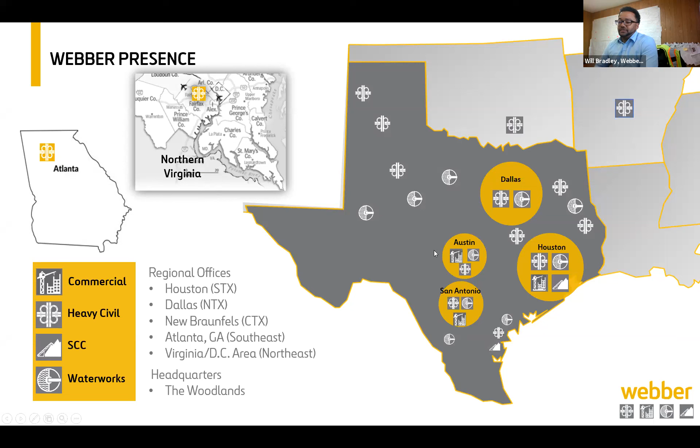A couple of past projects - I mainly wanted to bring these up to show some of the successes that we've had in the past, and how we transferred that, actually having some of the same people that worked on these projects managing the current 146 project too. So two of these projects were very successful for us in Webber's history. They're both projects that we did with TxDOT, and really at the end, the client was really happy with us.

So the first one on the left - can you guys see my screen, see my mouse on the screen, sorry? Yes, we can see it. Okay, so the project on the left is the I-69 emergency bridge project, San Jacinto Bridge reconstruction. This was a bridge that was damaged during Hurricane Harvey. TxDOT had approached us to put together a bid. We were one of 5 contractors that were invited to bid.

We were successful in that project, and we went to work very quickly. We were very aggressive with the schedule, and we finished that project 34 days early. We won both milestones on there, so it was a good project for the company and TxDOT. We were also awarded on that project in 2019 the TxDOT Project Award. So that's one project I wanted to highlight.

The other one, the US 290 Segment 5, is another one. I actually managed this project.

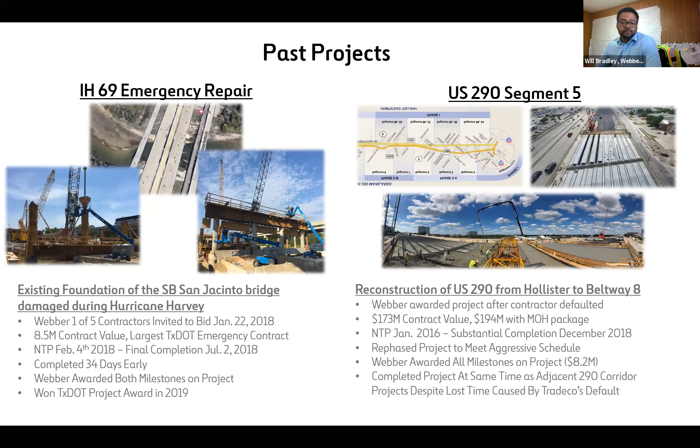So just a project overview. I pulled this picture from TxDOT's website. This project, SH-146, is actually part of the Grand Parkway 99 expansion. As you can see, the corridor, or the quadrant to the northwest, is already complete. Webber has a stake in this portion on the northeast quadrant, along with our parent company, Ferrovial, and another contractor, Granite Construction. The south portion of the Grand Parkway is not constructed yet, but you can see where we fit in here. This is the Clear Creek Channel right here. So 146, again, not only being an evacuation route for the people in Galveston, but also tying into the major improvements of the actual Grand Parkway.

So as part of the 146 project, we are building about 4 miles of highway. One of the major things we're doing here is a bypass bridge. It's a 116-span bridge from just north of NASA. It crosses NASA, crosses the Clear Creek Channel, crosses 2094 and 518, and then lands just north of 96. Along with that, also in the portion in Seabrook, we're converting it to a conventional freeway. There's going to be 2-lane frontage roads on the northbound and southbound, and also 6 lanes of actual freeway roads.

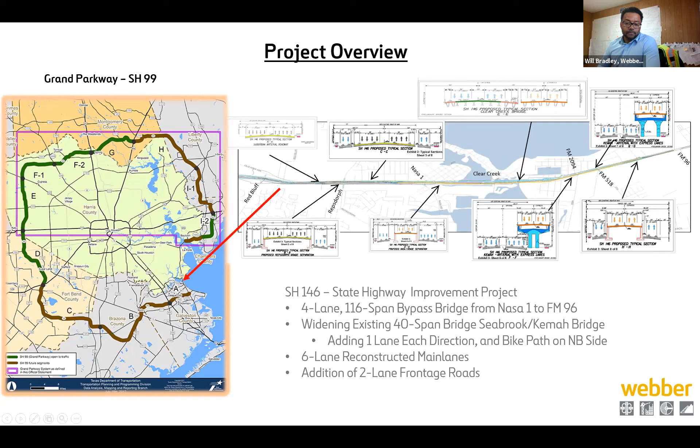Mainly just to go over where we're at right now on the project status: as of this month, November 2020, we're 45% complete if you look at the pay estimate. So if you look at the money we've collected versus the contract value, we've collected 45%. So we've done 45% of the work. We've used only 527 of the allotted contract days. This is the thing that, when we look at jobs, is where we want to be - ahead on work and not using all the time. So this means we're ahead of schedule right now, not substantially, but ahead.

Some of the work that's been completed - you can see here we have our drill shaft crews going right now. There's 450 of the drill shafts out of the 711 total on the project completed so far. We have 3 drilling crews that are going to stay with us all the way through the end of the year. Probably early next year, we're going to drop maybe 1 drilling crew and keep drilling with the other 2 so that we can finish all the shafts sometime around the summer of next year.

Right behind the drilling crews, we have 8 Webber structures crews that are building the columns, the caps, setting the steel girder or concrete girders, as you can see in this picture on the bottom, and then placing the actual concrete deck. So on the express bridge, which is the bypass bridge I was telling you about earlier, we've made 2 placements already, which consists of 8 spans, and we're going to make another placement here sometime next week, which will give us another 3 spans.

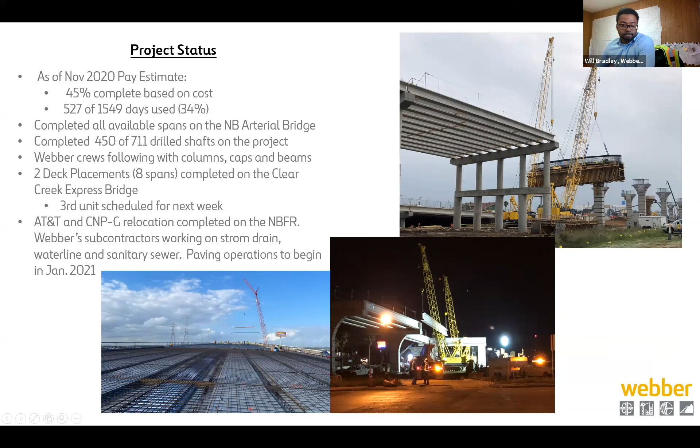Just to go over our strategy, as I mentioned before, we're really aggressive on the schedule. If you look at those past two projects I went into, we brought that same idea of trying to run and work everywhere we can to this project.

So if you look right here on the bottom, this is what our schedule looks like right now. Our current schedule shows us completing the project on May 2nd of 2023, which is over a year ahead. This is the contract date down here, June 1st of 2024. This is the contract date that, per TxDOT, is the time we have to build the project.

It's 1,549 days. We should be finished a little bit more than a year ahead of that, 12 to 13 months or so. One of the reasons why we're able to do that is that early on in the project, even before NTP, before we started working, we looked at the plans.

We came out, visited the site, and identified a lot of areas that we can work without affecting the traffic. In the specifications from TxDOT, they tell you, hey, this is the phases I want you to work in. I want you to work in phase 1, then phase 2, then phase 3, then phase 4.

What we did is that the specifications allow us to work in multiple phases with the caveat that we don't affect the traffic. So there's two lanes going northbound and two lanes southbound on 146. If we don't affect that, then we can pretty much work where we want to. We took advantage of that, and that's why we're able to get this reduced schedule. So this is what we're looking at right now.

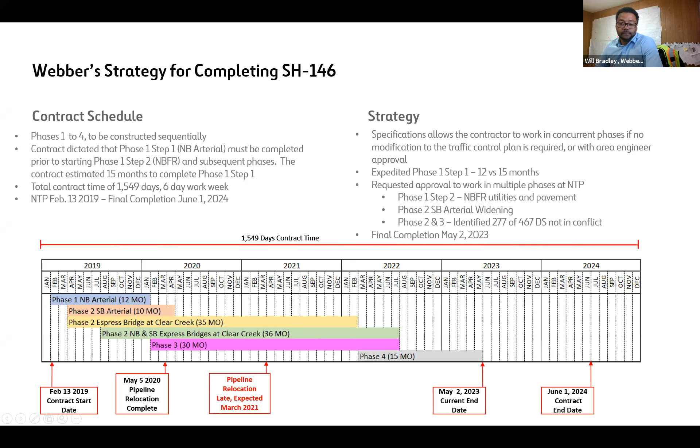Just to go over, I don't want to dwell too much on some of the challenges, but I think some of them are important to go over so everybody understands what we're dealing with. As I've mentioned before, the pipeline relocations—there's a major pipeline corridor running along the project all the way from Red Bluff to 96, right in this area where the existing power lines are.

So we have one of those pipeline companies, Enterprise, which was supposed to be relocated by May 5th of 2020. They're still not relocated yet. They just recently moved onto the project and started their work, but they're projecting right now not to be finished until March of 2021.

So what that does for us, if you look at this picture up on top, you can see we're coming with the structures here. We've got beam set, we've got caps ahead of us, we're building columns, but then when we get to this area here, we can't finish our work because that actual pipeline is in our way. So it creates an issue.

We're trying to work around it. We're trying to work with TxDOT to come up with some ideas or ways that we can get around this pipeline so we don't have to wait on that date.

The other issue is that Enterprise is going to relocate, but then there's some questions about what they're going to do with the relocated pipe. They're saying they're going to leave the pipe in the ground. It creates an issue if we have a direct conflict—we can't put a drill shaft into that pipe. So it's something we're going to have to look at.

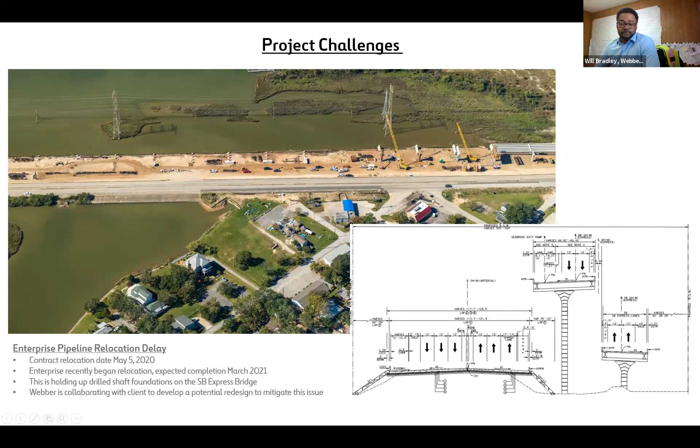Same kind of concept with the Enterprise gas line. We also have other utilities, AT&T, CenterPoint Gas, that are late. So if you look at this picture on top, we have beams out here in the middle of nowhere. They don't connect anywhere.

Right in this area there's 5 more bents we need to build that connect up to the abutment. This road on the left is NASA 1. We'll actually cross NASA, but we were only just allowed into this area now because CenterPoint recently finished their relocation, which they should have completed in February of 2019. This is where it causes issues for the contractor, because these utilities are so far behind. We're trying to get the project done in a timely manner, and that's why we're pushing.

So we went ahead and did the shafts, columns, and caps, and set the beams where we could, leaving out the ones we couldn't access, with the thought that these utilities would be completed in a timely manner. That didn't happen, so we ended up with gaps like this.

Another thing we're trying to do, on the west side of the structure, is build the future southbound frontage road. We can't build it right now because the Enterprise pipeline is under where the road is supposed to be. We approached TxDOT and asked if we could take the storm drain system that's in direct conflict with the Enterprise pipeline and move it toward the east.

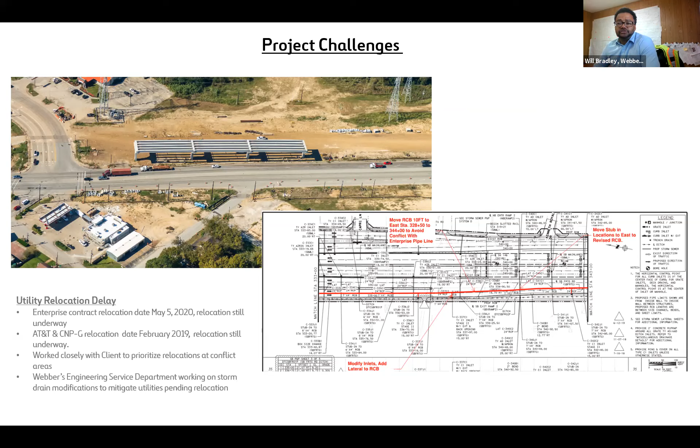We didn't do that. We got approval to work in multiple phases, which saved us a lot of time on this delay.

What happened is we were driving piles in the water. We did two footings on bent number 26, then moved over to 25. As we tried to drive the piles in the water, we hit some obstruction on the bottom and couldn't get them in, so we moved over to 24.

The same thing happened again. We tried to drive the piles in the water and couldn't get them in. We did some probing and figured out there was a substantial obstruction in the water. We told TxDOT we couldn't get these piles in and needed to look at alternatives for a redesign.

We had our technical services go out and look at solutions, but we couldn't come up with anything TxDOT liked. So TxDOT did the design on their own and changed those piles to drill shafts. Webber then found a specialty contractor who could do drill shafts, but they would have to drill through the existing obstruction.

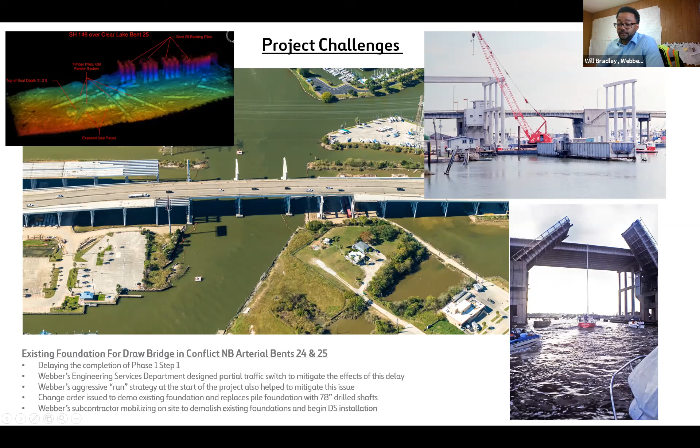We very early on looked at that and identified it as a problem. We approached TxDOT and said, is this really something you want us to do? It's going to back up traffic both in the mornings and evenings. Let us try to look at some solutions. They agreed to it, and then we approached our engineering services department, and they were able to come up with this detour for us where we could eliminate that single lane in each direction for that 8-month time period.

So again, the engineering services department for us, and how Webber approaches the project, this was a win-win for the client, the traveling public, and for Webber, because it allows us to do some of the work in phase 2 instead of phase 4, which is what we want to get done earlier. And for the public, it eliminates that one lane in each direction, so the public will never even see that at all. There's going to be no complaints about it. So it's something we were looking at far in advance, and we're able to come up with a solution.

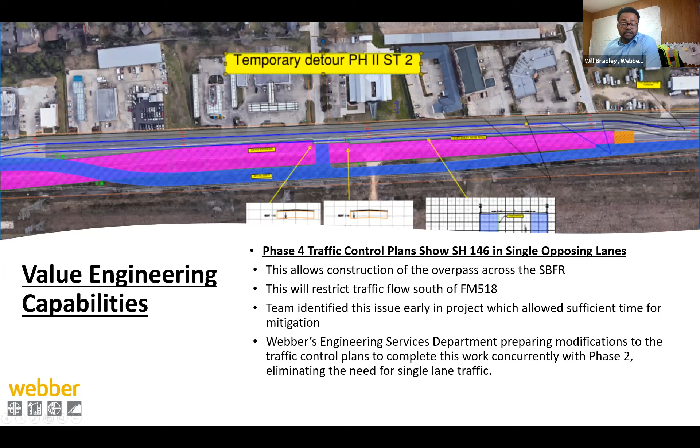So right now our guys are actually working on the redesign on the traffic control, and coming up with the actual drawings for us right now that we can put in place sometime in January of next year. And then I think that's pretty much all I had.

I wanted to just summarize here, again, this concept of running, we want to work everywhere we can, which is the way we approach the 146 project. We want to look at our value engineering. We have several different aspects of value engineering going on right now, the redesign on the storm drain, the redesign for the traffic control. Really our main goal is to complete a successful project for the client, for Webber itself, and for the traveling public. So with that, I would open it up for any questions that you guys might have.

Give me 1 second, let's see. Do we have a question coming in? And Will, while I'm looking for that question, it looks like maybe from...

Ronnie Richards. I did have a question about the storm drainage situation and how that makes up the component of this whole project. Because over the past decade, I think in TxDOT projects we've seen more inclusion of storm and drainage solutions. So what role does that play with the 146 project?

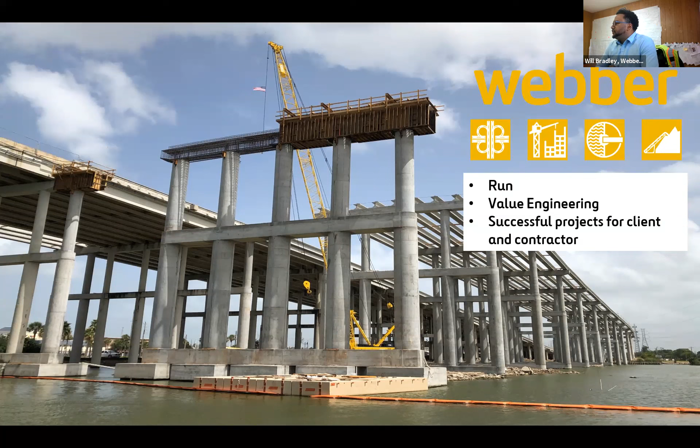Well, can you see my screen when I do this? Can you see Google Earth on there or no? I'm seeing your presentation. Let me try to share. Let me do one thing. Okay, here, sorry, let me see if I can share this. That way I can explain better to you. Okay.

Are you able to see Google Earth now?

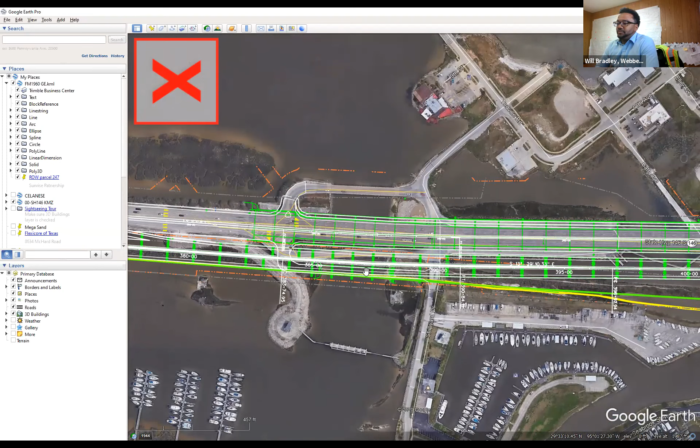The storm drain work is part of our contract, so we have a specialty subcontractor that would come out and execute it. But what we did in that area, because the enterprise pipeline isn't done, let me zoom in and get you some bearings. North is to the left, south is to the right. This is NASA 1, and this is where we're building the existing bridge right now. The enterprise pipeline is right here. So we can't do any of this frontage road work until that's taken out of our way, which is late.

It should have been done already. We approached TxDOT, and normally they would come up with the redesign on their own, but I think it was just a problem of timing and where they have their resources right now. They weren't able to do that, so we offered up our capabilities and they agreed to it. We're actually working on that solution right now.

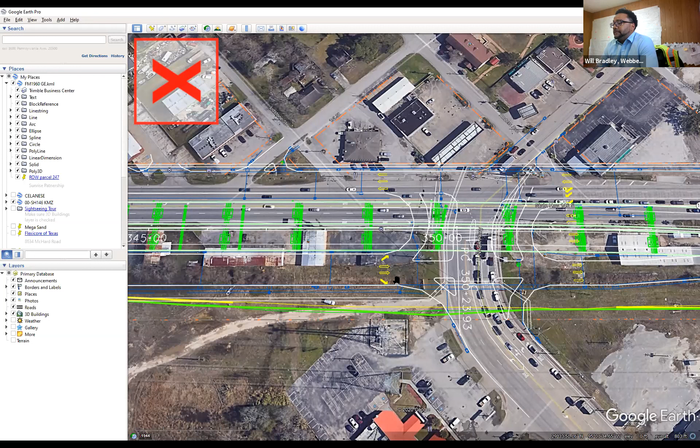Okay, all right, thank you.

Ronnie Richards is asking if we have any idea when the connection between the Kemah and Clear Lake Shores under the bridge will be completed so we can access Kemah by golf cart and bike.

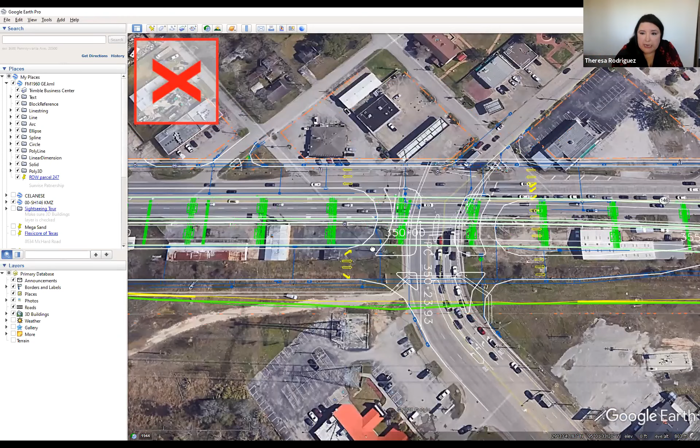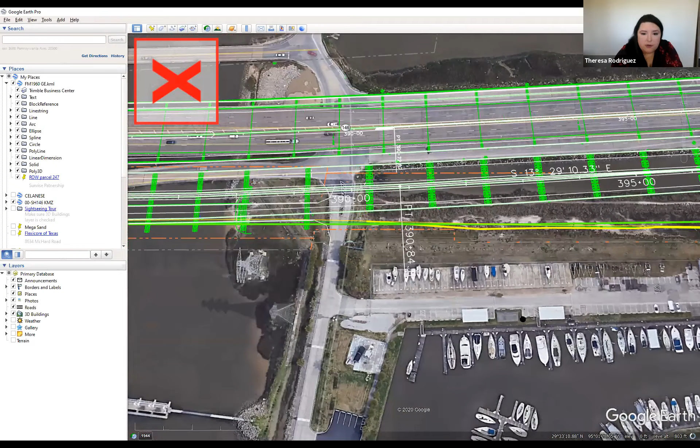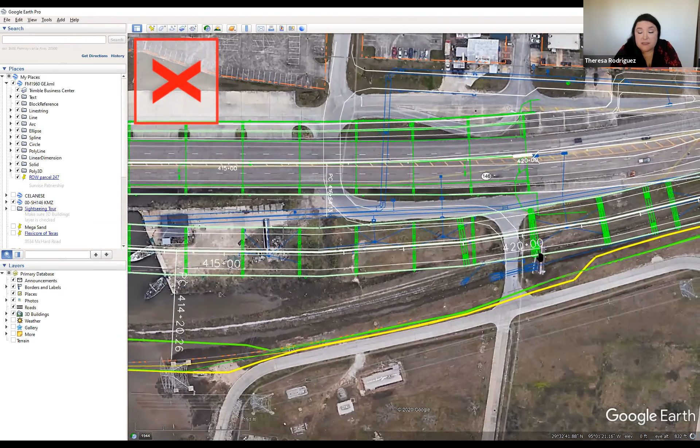Can you repeat the question for me, Theresa? Sure, the question is if you have an idea when the connection between the Kemah and Clear Lake Shores under the bridge area will be completed so that Kemah can be accessed by golf cart and bike. Well, I assume he's talking about this portion right here.

Under the bridge there was an underpass, like in this area here if you can see my mouse. Really, because of safety concerns, we're going to have to get out of phase 2 first, which is us building the actual express bridge. That's probably not going to happen till closer towards the end of 2021, so we won't be able to open that actual access way until the end of next year sometime.

We do have this portion to the north opened up, kind of halfway in here, so you can actually use a portion of this U-turn, but there's no paving here right now. If you look at the project right now, this is where we have all our construction equipment. We're setting the girders across here right now, and building these caps on this side. So I'd say towards the end of next year is when we can look at that being opened up, before the project is done, of course, but not until we get some of the bridge work done.

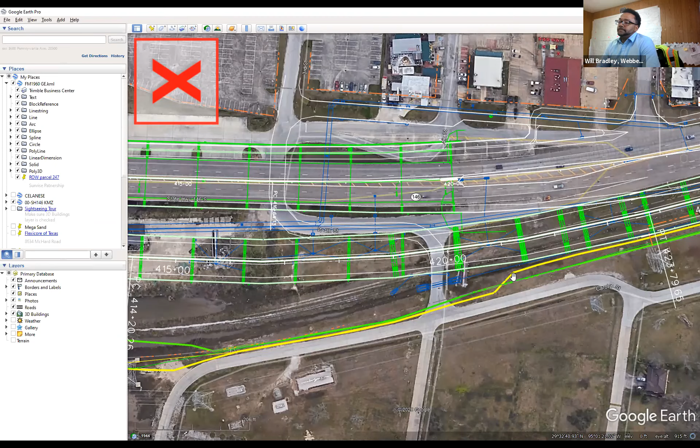Okay, let's see. And from Seabrook Council Member Ed Klein, he's asking what the schedule is to complete the northbound bridge.

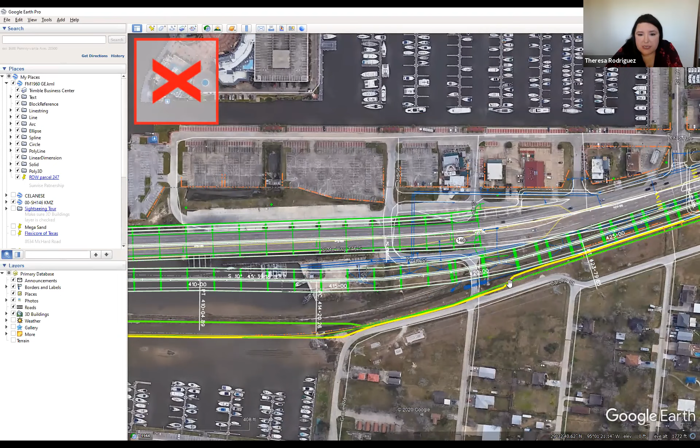The northbound arterial bridge. Well, really, this is the area that I showed you where we had the conflict, where we hit that existing obstruction. So we have our contractor on site right now, our subcontractor that's doing the drill shafts for us. He probably needs about 2 months to finish that, and then it's probably going to be another 3 months or so. So I'd say sometime towards the summer, we'd be able to open up the northbound portion of the arterial bridge. But it should have been open already.

It's not open right now because of this issue with the obstruction from that drawbridge that was here, because we can't build these two bents here.

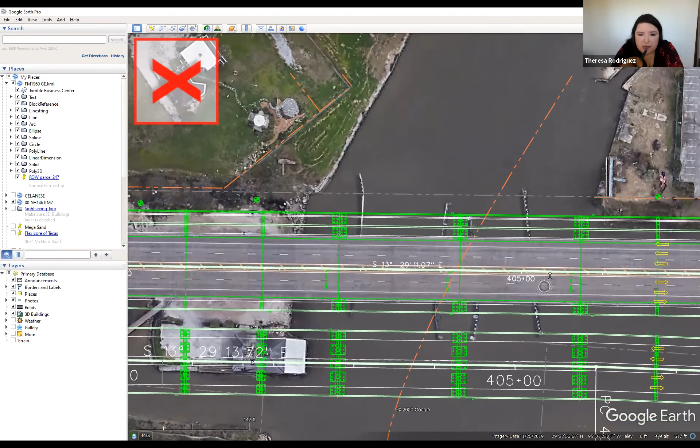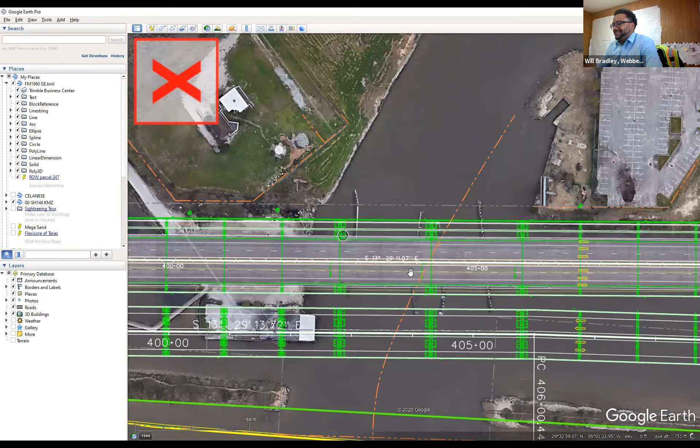All right, I'm not sure if this was just for clarification. He asked again, what is the schedule to complete the northbound frontage road between NASA Road 1 and East Meyer? Oh okay, he's talking about a different area, sorry. That's okay, yeah, the frontage road.

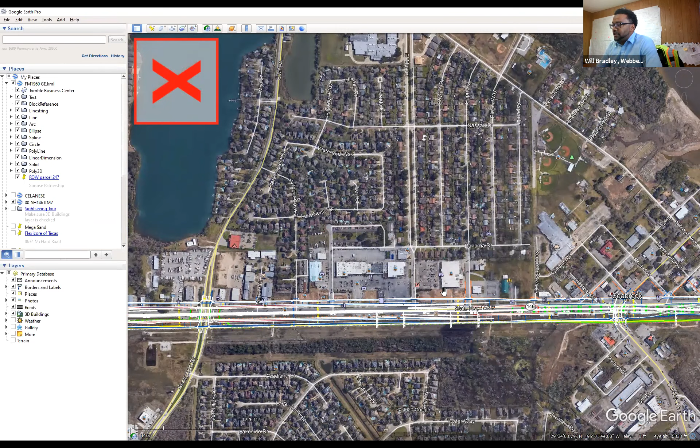Okay, so really, this is NASA 1 right here, and then East Myers is just up this way, or Repsdorf is right here. So really the problem with this area is that it's part of phase 1, but when we took the project over, AT&T and Centerpoint Gas had a lot of conflicts in this area from those two utilities. They just recently completed their relocation.

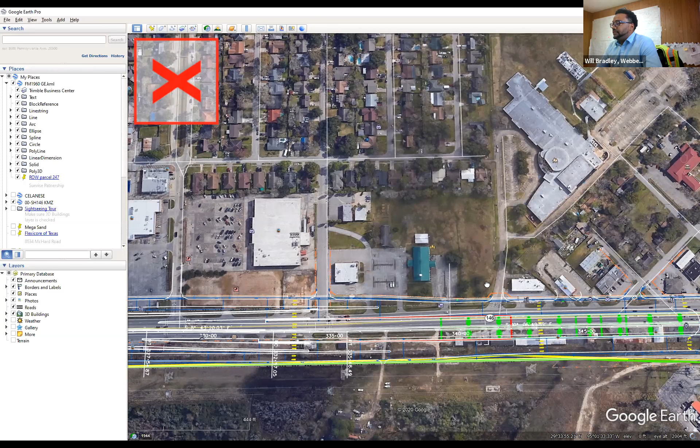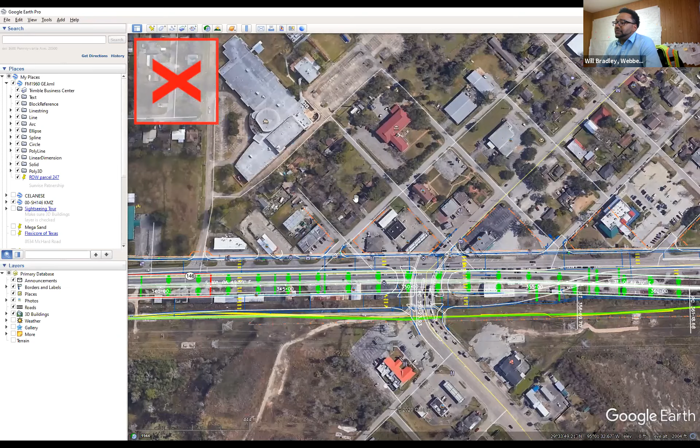So the plan right now is that we have our crews finishing up the storm drain, the water line, and the sanitary sewer. Then come January of 2021, a couple months from now, we're going to start actually paving. So I'd say maybe just right before the summer or so, we should see some actual concrete paving on the northbound frontage road. It's going to be right around 3rd Street or so, all the way up to Red Bluff, not just up to East Myers, so we'll be tying that in also all the way down.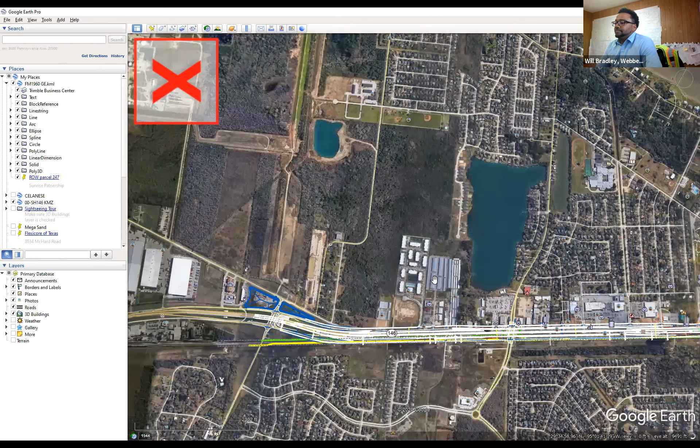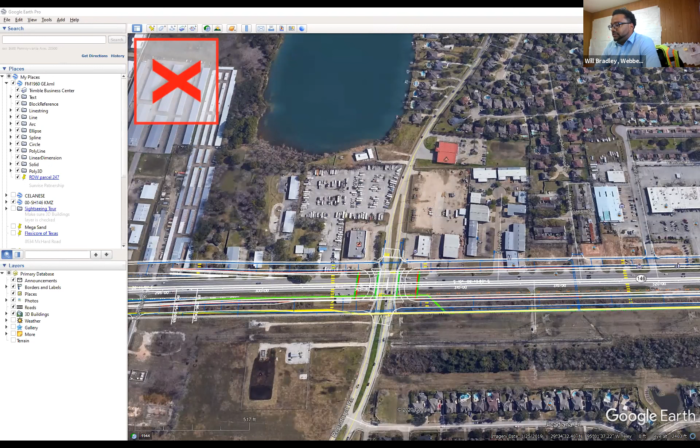Is it May 2022? I think it was May 2023, is that right? Right now the current schedule that we turned into the client is May 2nd of 2023. That's the schedule we have to turn into TxDOT every month, showing our completion date of May 2nd of 2023, about a year ahead of what the contract requires.

This is the first phase of a two-phase part of the 146 project, and the second phase starts at 96 and goes down to somewhere in the 517 area. Do you know when that's scheduled to bid? I'm not sure exactly, but I believe it's sometime in 2022, don't quote me on that. It's a project we're actually looking at too, but I believe it's more than a year off, don't quote me on that.

One thing we never got squared away about phase one, as you know, this part ends at 96, which is a traffic light. So we've got all these cars rolling on the higher lanes thinking they're really rolling along, and then suddenly they hit a stoplight. Since you guys are ahead of schedule, is there any way that bridge over 96 could be moved up?